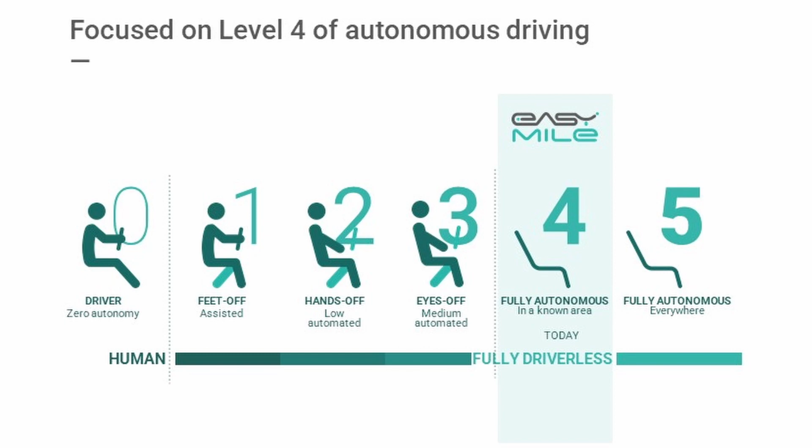Our strategy is to focus on use cases where we can provide real services and bring payback to our customers, which are technically accessible today. Part of those use cases are factories, logistics centers, airports, ports, and also passenger transport on closed sites, as well as for last mile applications.

For example, this video shows 3 interesting sites where our vehicles are operated. Yellow shuttles are 2 shuttles operated in Berlin by BVG. The white shuttle is operated in Hamburg and provides an on-demand transport service deployed during ITS 2021, with 50 stations enabling inhabitants to travel with our shuttle across an entire district.

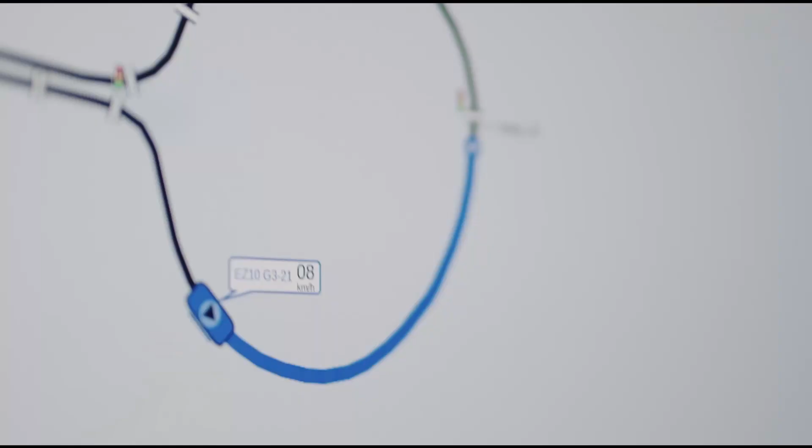The white and orange shuttle is recorded on the Oncopole site, where our shuttle transports hospital guests from the parking to the main entrance of the hospital. This site has been the first in Europe to get the authorization to run without any attendant on board on a public street, at the end of 2021.

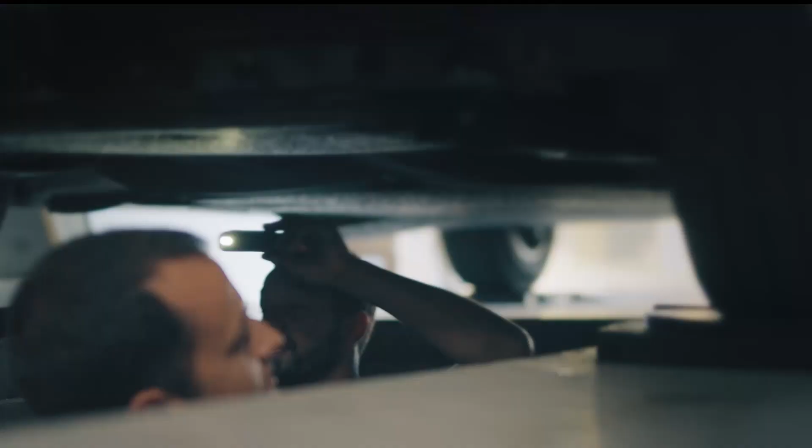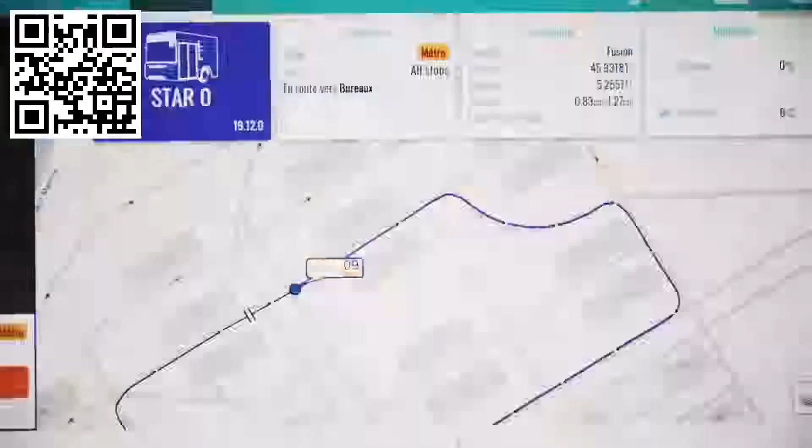We offer our autonomous driving technology to different customers, like transport operators for passengers or private site owners. For the goods transportation part, we sell our autonomous driving trucks to either transport operators or factories which can operate their vehicle by themselves. We also have a big activity toward licensing our autonomous driving solution or some of our expertise to different OEMs.

We work with Terberg and FDS on deploying an autonomous yard truck to transport containers at the biggest European port. And we work with Kion, the European leader in material handling vehicles, to automate their counterbalance forklift to move batteries from one building to another in a factory.

I will now let Romain Dupont present our safety methodology.

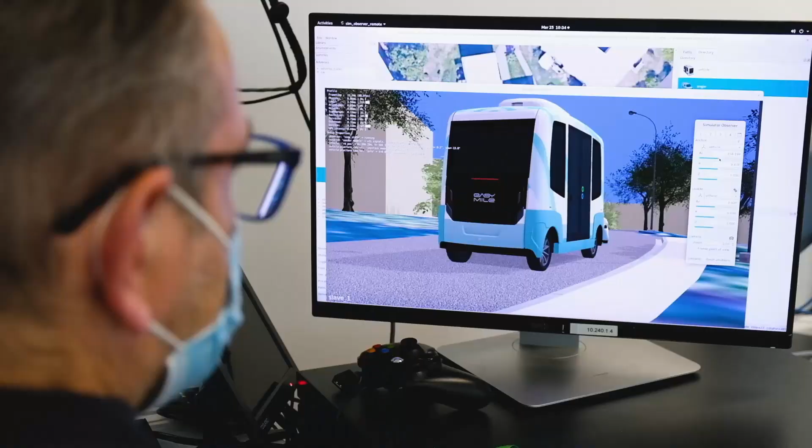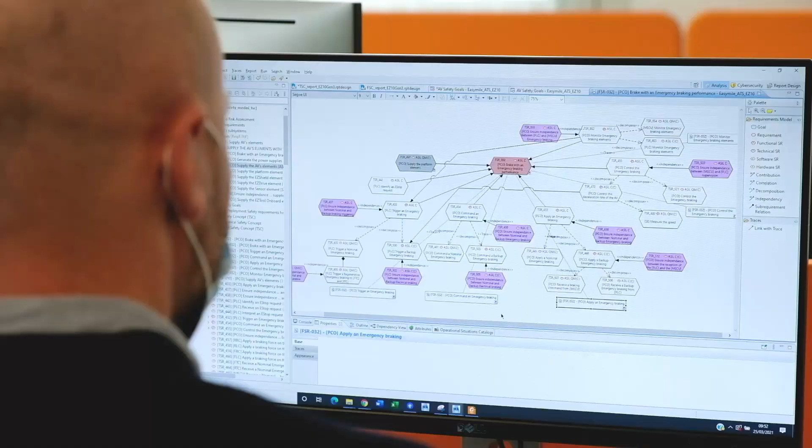I want to tell you why our technology is safe by design. It's about providing you a service based on autonomous vehicles that can handle any situation, based on complex systems that have been designed considering safety as part of the answer. Any situation means defining what we call the operational design domain, ODD, combining all the situations we want to address, and these situations are then analyzed in order to identify all the potential hazards and specify mitigations that have to be achieved to guarantee the safety.

I have a dedicated team for the safety activities composed of highly qualified experts coming from various industries where safety is key and highly regulated.

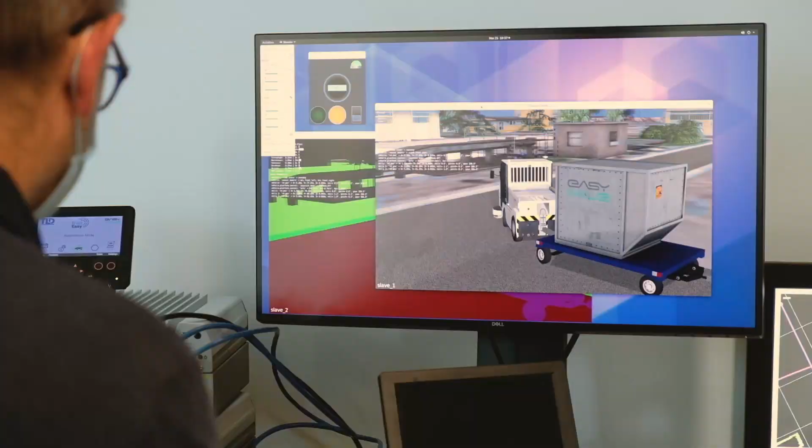They bring their experiences to the project and to the design. Safety is a combination of simulation test benches to make continuous integration of our hardware and software, but also to recreate complex situations. We also have real-life testing, part of them done at our premises, but also with partner laboratories to recreate complex dynamic situations where we have bicyclists, pedestrians, other vehicles, but also to recreate harsh weather conditions.

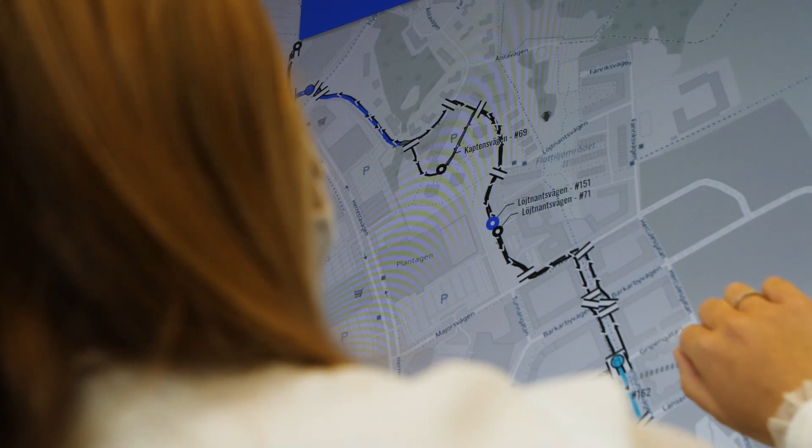To guarantee and demonstrate our safety, we need an independent judgment from experts. So we bring in independent or third-party assessors from the very beginning of projects in order to have this independent judgment about the behavior, the performance, but also the integrity of all our safety architectures.

So you see, EasyMile's technology is complex, but the result is simple, smart, reliable, and objectively safe.

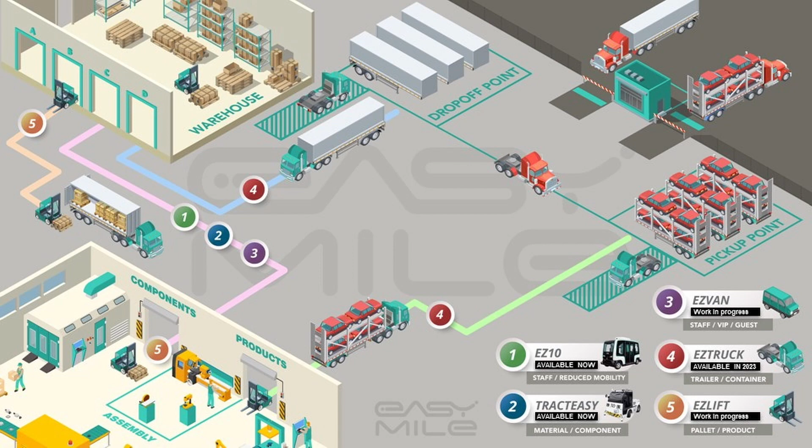Let's focus on one specific autonomous vehicle, the TractEasy. The TractEasy is a product co-developed with EasyMile as the autonomous driving technology provider and TLD, which is a world leader in ground support equipment.

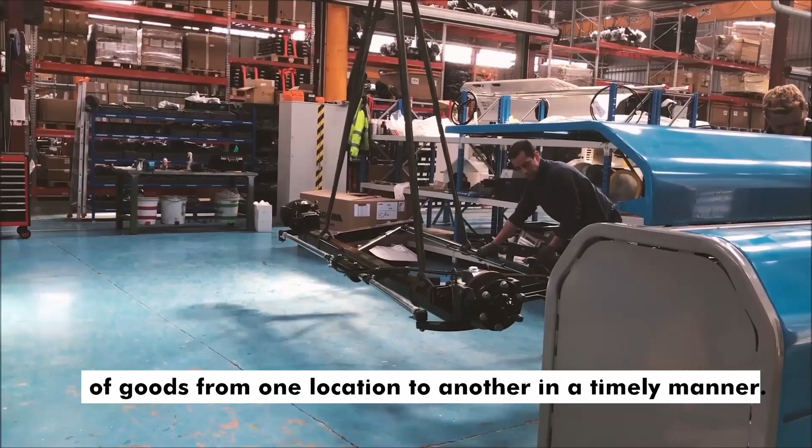TLD is providing different vehicles like luggage tractors, pushback, stairs, and all the different kinds of specific vehicles you can find in an airport.

TLD is working on developing the hardware part of the vehicle itself. They are building the vehicle in their factory and installing the autonomous driving solution of EasyMile on it, realizing a factory acceptance test on a test track in their factory, and then deploying the TractEasy at different airports around the world.

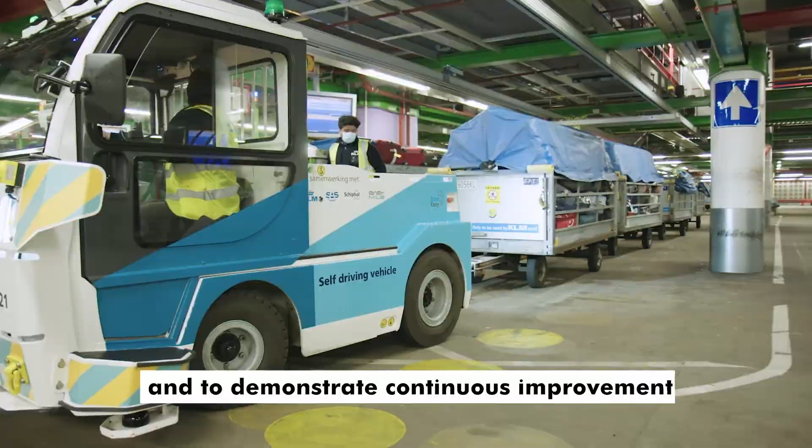EasyMile is providing the autonomous driving solution, but is also taking care of the business development of that solution for all sectors except airports. We handle the vehicle installation, deployment, as well as maintenance with partners on different industrial sites.

The TractEasy is a groundbreaking driverless and zero-emission electric tow tractor. It revolutionizes operational flexibility for ground transportation of goods on industrial sites, logistics centers, and airports.

It follows predefined routes, warehouse management system orders, or on-demand requests via an app. It can pull up to 25 tons without dedicated infrastructure. It's suitable for harsh weather conditions, indoor and outdoor.

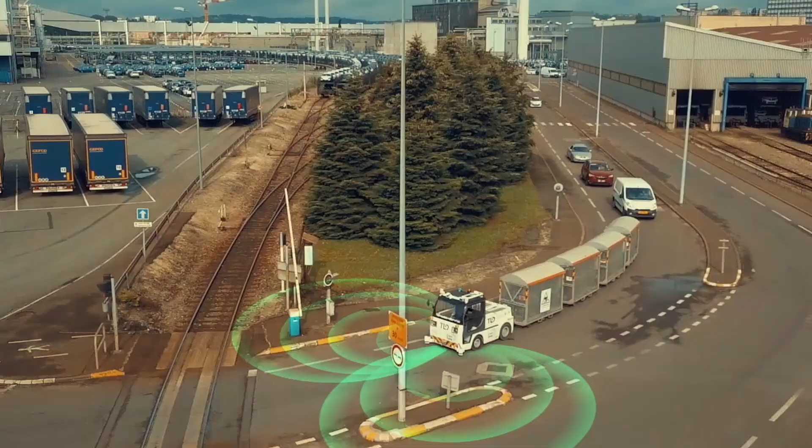It detects and avoids potential obstacles thanks to a full set of sensors, including Velodyne Lidars, vision, GPS, odometry, and inertial measurement unit. Thanks to wide-angle vision, it sees up to 100 meters at the front and 40 meters to the sides.

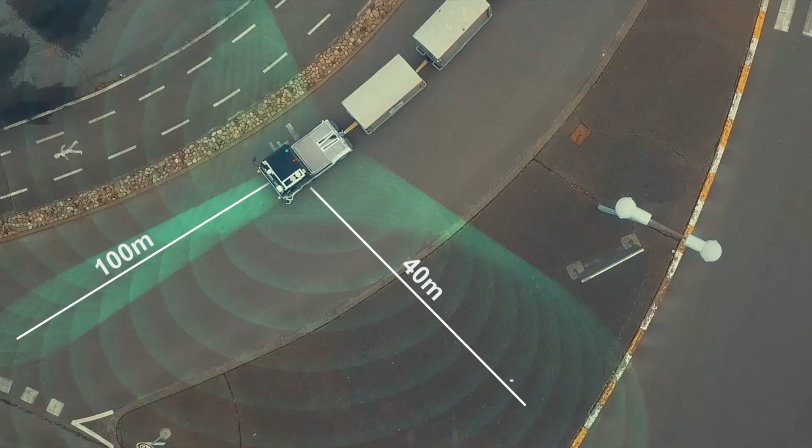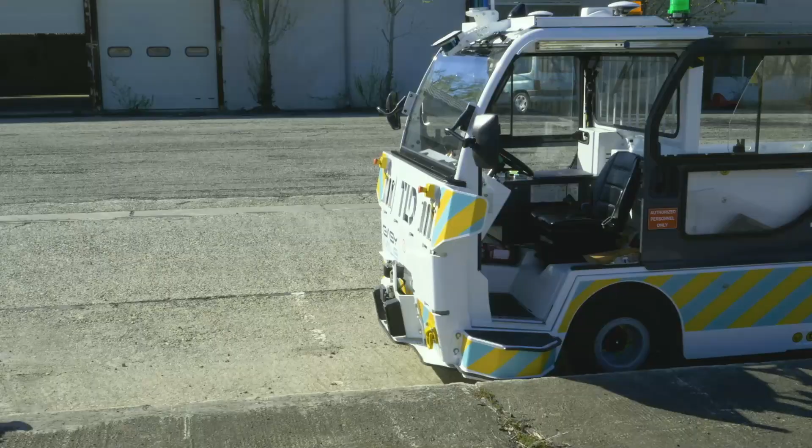It communicates with traffic lights via V2X communication. TractEasy has docking functions which enable it to dock really close to a belt of a sorting area or a conveyor for automatic loading and unloading.

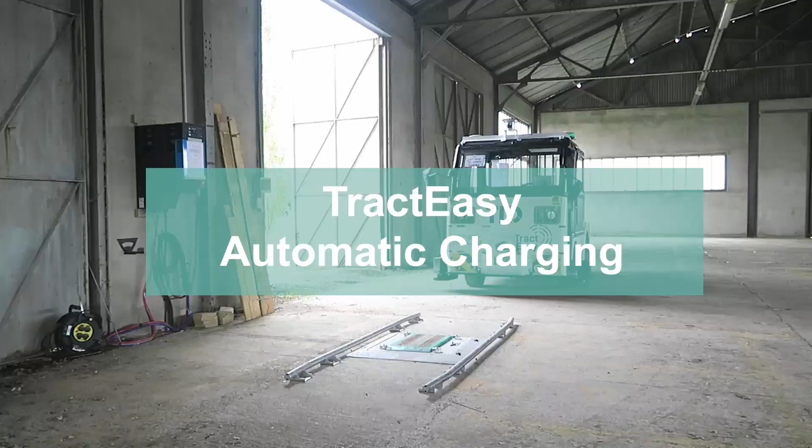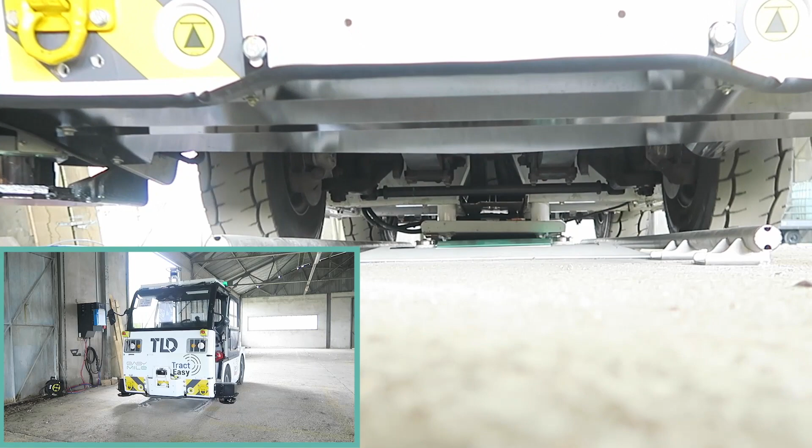TractEasy also has automatic charging capability. As you can see in that video, there are two conductive plates positioned on the ground, and the TractEasy, thanks to its autonomous driving technology, can stop really precisely at the position of this plate, ensuring contact and charging automatically. I will now let Kevin Haro introduce you to how to automate your logistic flow with the TractEasy.

An important part of logistics processes is loading and unloading, and I want to show you how easy, convenient, and safe it is to do so with TractEasy. For example, TractEasy arrives at your assembly line.

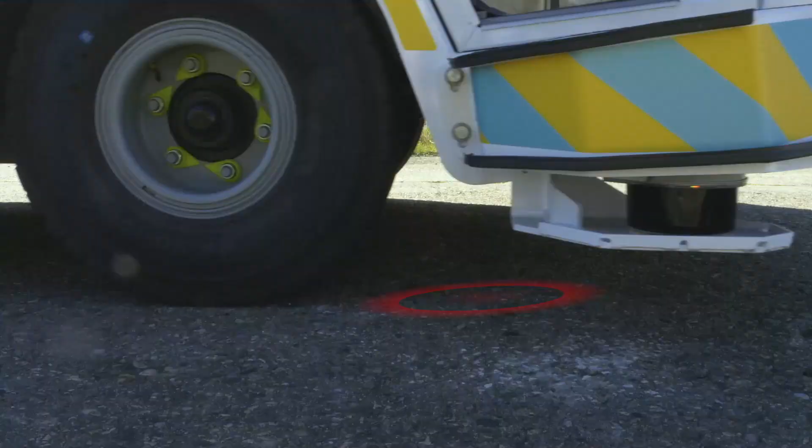1. The vehicle will park at a predefined point. 2. The operator will put the TractEasy in a safe mode, preventing the vehicle from any movement. 3. Now the operator can safely load and unload the goods. 4. Once done, the operator puts the TractEasy back in its operational mode. 5. Finally, the TractEasy is ready to go to its next destination.

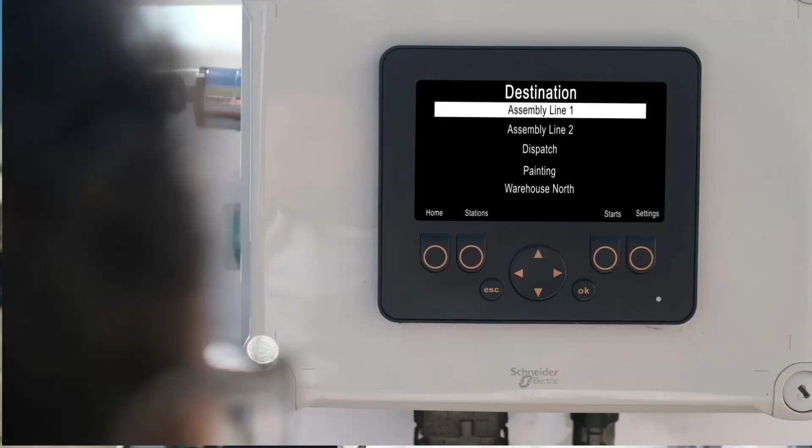To do so, you can just press a button on the vehicle or remotely, and you can even choose a specific destination on the vehicle panel or through the supervision system. So you see, TractEasy has been designed to be easily integrated into your logistics processes and interact with your employees. Loading and unloading with TractEasy is very intuitive, easy, and most of all, safe for your operations.

I hope you enjoyed that video and it gave you a good overview of what we do at EasyMile.